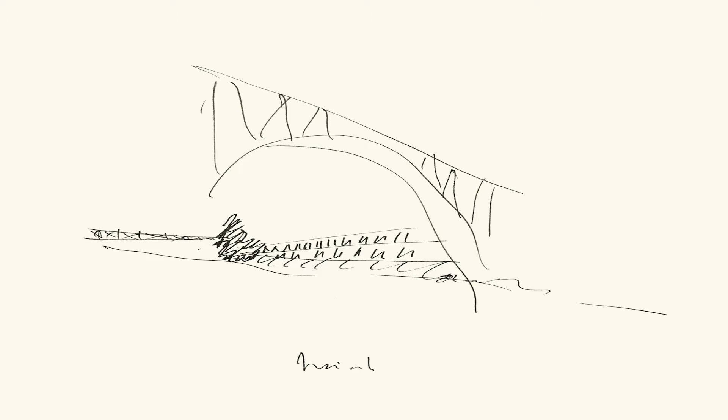How to face the program, the constraints, the budget, with everything - that's part of your job. Being from abroad as us in Zurich, we were conscious that we had to solve those issues, and we had to propose something that for us is very important.

We needed to be specific on the site where we were working - that's your job as architect, to be specific on the sites where you work. But at the same time, our approach needs to offer always something personal. We used to call it sentimental - an approach that allows us to transmit things with the buildings we do. This is something the sketch is trying to describe.

There is a moment that something personal always appears. Because to deal with the context was, in this case, to deal with what I call the family members - this primary school, the building we had to extend, the existing Tanzhaus, and this housing block at the back.

At the beginning we thought we didn't want to do a building, we wanted just to propose a kind of emblematic public space. That's why we tried to deal with the playground of the primary school. We wanted to extend the pathway close to the river, and propose a nice garden where the buildings could compose an ensemble.

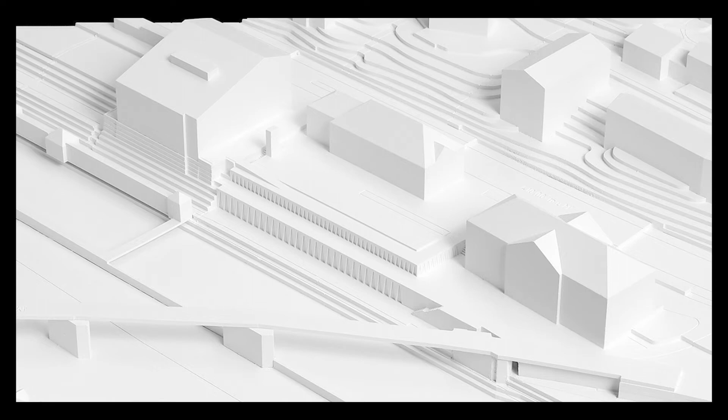We were dealing with the physical context, and that was quite useful. But to be specific means something that goes beyond the idea of the physical fact for us. We were conscious that finding the right answer in a place isn't just about playing with the physical elements - we wanted to achieve the right character or attitude of this building.

That's really important for us as architects - to try to find the right character of the work we do. In this case, we composed the building trying to reduce our movements to the minimum, just proposing a couple of walls that could define this kind of plinth for the ensemble of buildings at our back, characterizing these walls through elements - the sequence again, like in our neighborhood, the repetition of an industrial element.

And this is how the building appears.

It's just two walls, stepped back, trying to control what we call the fundamentals. We play with the fundamentals always, the idea that we are architects. So we play with scale, proportion, light. And we wanted to control these items, these issues.

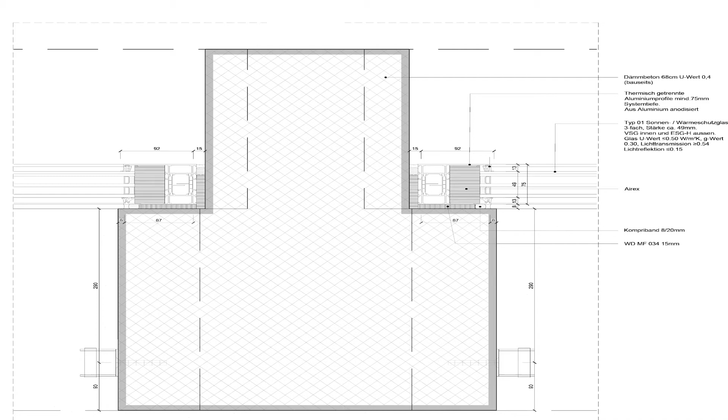And we wanted to somehow generate a background for what was in front of us, this greenery that was always characterizing the appearance of the building. We tried to reduce the movements to the minimum. We decided to build everything with concrete, with recycled concrete, trying to understand all the elements composing a building. A building can be an endless history, but in this case we wanted to totally expose the construction of the building.

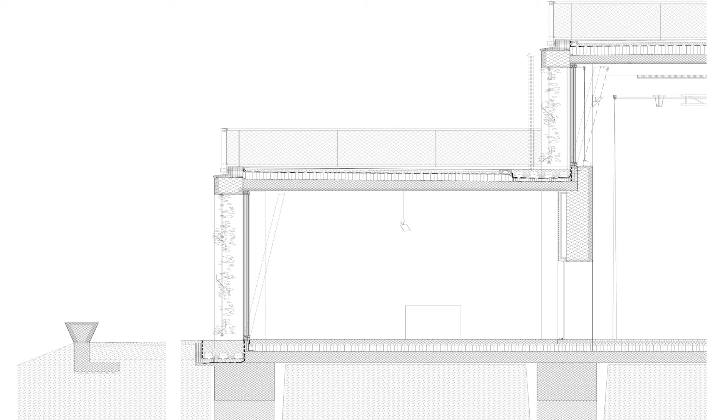So we tried to reduce as much as possible the materials. We wanted to reduce all the elements that are always faking what a space means when you build something. And we started to play with this idea of the walls, this stepped structure, and what was a wall in Zurich, and what's a wall in this context.

Well, of course, it's a public building. And it's a public building that needs to express its presence into the city, needs to scream somehow, needs to declare that something is going on there, and needs to transform this place into a new social space, needs to attract visitors. This is what we try to do with this repetition of elements.

Then of course it's not just a desire, because we are architects. It's something that we wanted to do. It's an obsession somehow. But it's not just an ornament. It's an element with meaning.

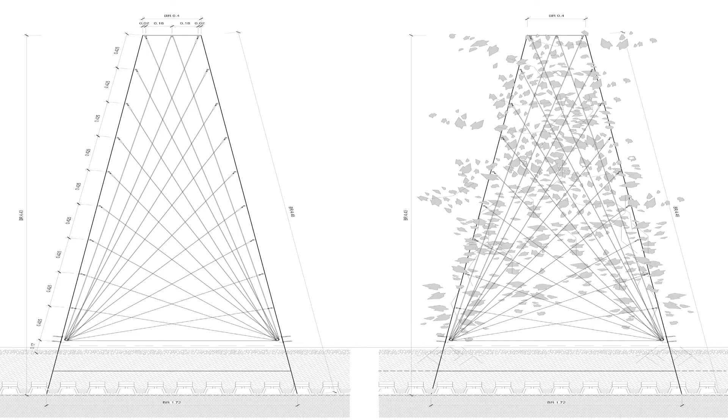These walls are facing south, so the triangles help us achieve a good balance of openness and closeness, this 50-50% that we had to achieve. It's an element that allows us to introduce all the technical requirements we had to solve, the idea of how to filter the sunlight, how to control the energy that enters the building, trying to bring nature back into the building, proposing that plants and flowers can control the sunlight from the exterior, and the building appears as a background of this nature.

So it was not just an egoistic decision. It was a decision with meaning for us, because for us, architecture needs to have meaning by itself.

And this is Zurich in 2019.

Somehow the building is not a building, it's a landscape. And we like to call it landscape because it belongs to this place, belongs to this landmark. This is the silo in Zurich, the highest building in Zurich. But the building plays with this landscape because it belongs to this landscape.

This is something we wanted to do since the beginning. And this idea of landscape appears just from the top of the building, because the building looks back to the city, tries to recover the importance of the city, tries to show and rediscover how the city works in this neighborhood.

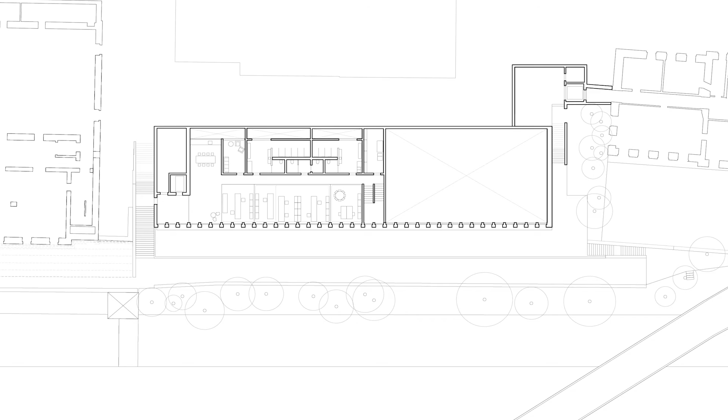At the first level, where the offices and the dancers' areas are placed, the public space extends its importance in front of them, trying to combine the playground of the school and the daily life of the offices. That's why the public space appears at this level, and inside the building it somehow explodes.

Of course, it's a building that tries to reflect on these typical issues that architects always have in mind: mass, gravity, light. We worked always with the same material, not because we were obsessed with recycled concrete, but because we wanted to focus attention on the space itself, and not on all the accents that usually characterize the main architecture we are used to seeing.

How the offices are characterized by a repetition of elements that are always the same but always different, because the flowers and plants are always characterizing your own landscape when you are inside the building. And how the light can transform and shape a simple space like this.

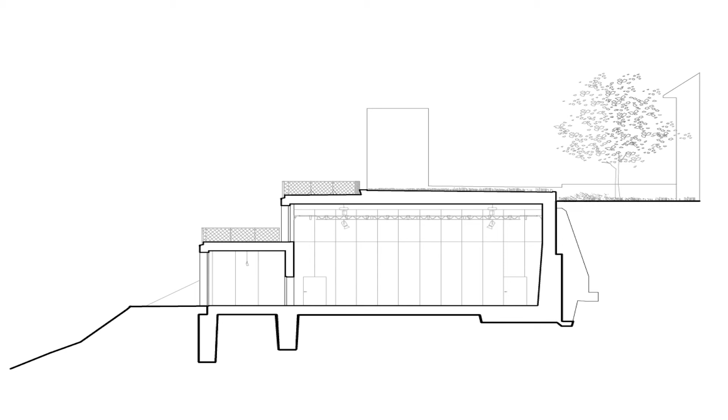Just through facing south, at the ground level the main uses appear: the studios for the dancers, and the main room where the performances and plays run every week. At this level the building shows another kind of scale, becomes more human somehow.

We increased the pathway close to the river. We just put a bench here, trying to activate the life in front of the building, trying to blur the limit between exterior and interior.

And here appears the foyer, the main lobby, the space where interior and exterior are totally blurred, and where the walls, this endless sequence of triangles characterized in this atmosphere, transform the space into something that introduces movement, light, shadows, something constantly changing.

We always had in mind the idea that building a wall for dancers should be something different than building a wall for an office building. That's why we were reflecting on how an architect struggles in the same way as a dancer with gravity.

We thought the way you touch the ground should be different, and that's why here the triangles try to touch the ground in a different way. That's why the shadow, the light, the rhythm changes day by day, season by season, and everything is filtered through these ideas.

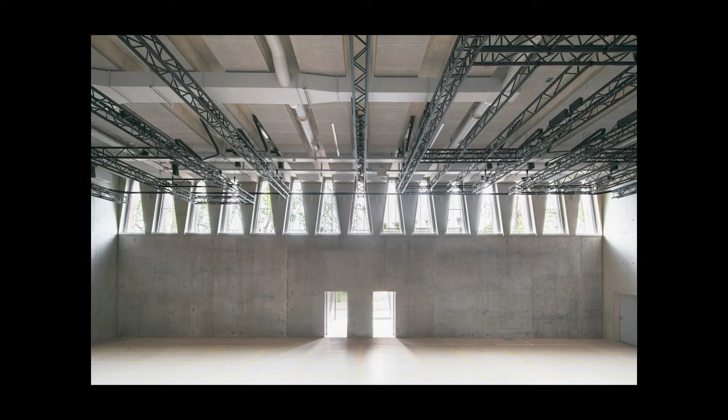How to play with acoustics, just inclining this wall a little bit, trying to avoid the parallelism, how to play with the essence of the space.

Here you can see the contrast between what was a wall and what a wall is for us in this building. And this is how the building appears from outside.

I told you it was a good sample for us because it describes the way we understand architecture nowadays. I'm not sure about the next years, but it's a building that tries not to be a Swiss building, it belongs to this place.

I think it's a building that tries to rediscover the character and identity of this place, tries to propose a new reality. That's something we're always looking for, and mostly it tries to filter the idea we had about architecture when we faced this place.

An architecture that most of the time tries to find a balance between the idea of intimate and monumental — monumental understood as something that can transmit things, that describes a link between past, present, and future, and a building that proposes that public space has its importance in the city because it's what makes the cultural life.

It can somehow build society. Thank you very much.